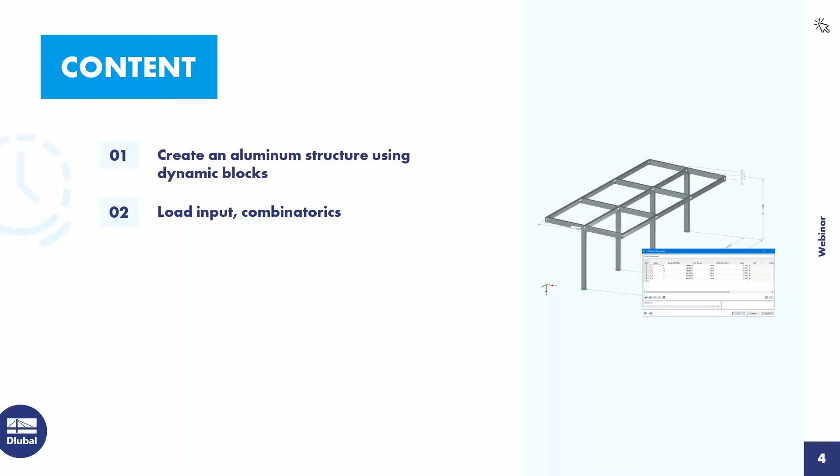Now to the agenda. First point is creating an aluminum structure using dynamic blocks. Then load input and combinatorics. Then the design of the structure according to Eurocode 9. And finally the printout report documentation.

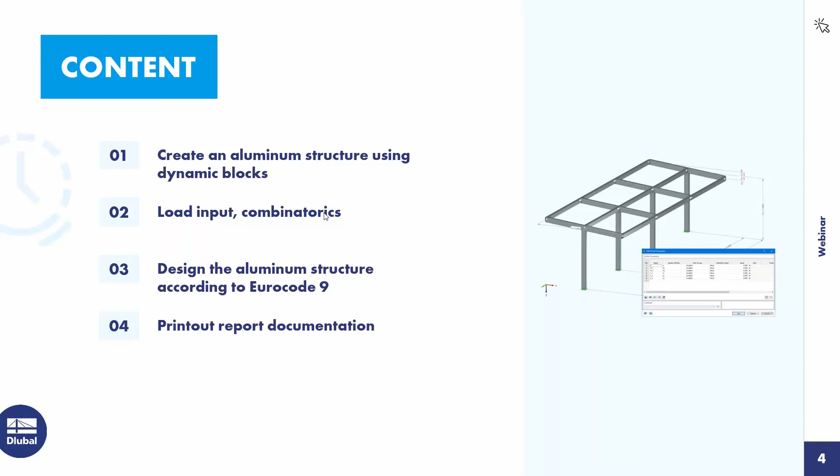This construction can be modeled by entering objects in graphic or tabular form directly in RFEM. This has already been shown in detail in previous webinars. In addition, there's also the option of saving object groups as a block and then reusing this block. In RFEM, three block types are distinguished: non-parametric blocks, parametric blocks, and blocks with JavaScript. I would like to introduce you to all three block types.

In the case of a non-parametric block, the structure has been created without parameters. The model you see here was created this way. The node coordinates are defined by values, with no formulas used. In order to save the structure or partial structure as a block, it must first be selected.

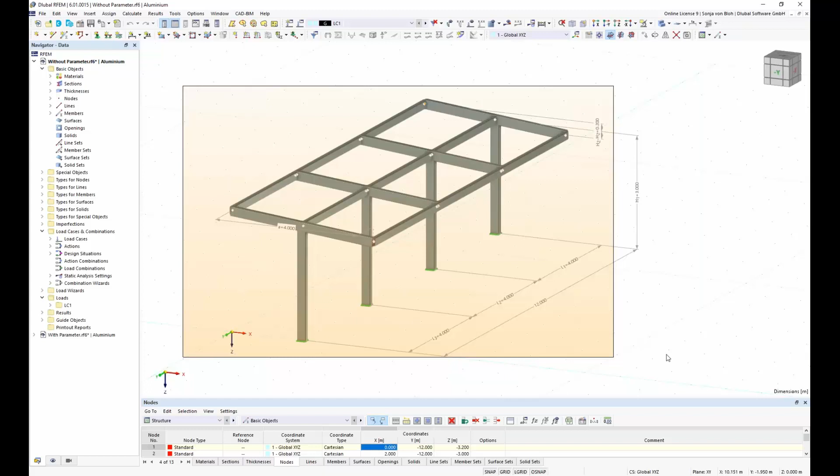I want to save the entire structure as a block, so I select the entire structure. Then I go to File, then Save as Block. Here I have to enter the name, and I also have the possibility to do a classification.

The classification is used as a filter so that I can find the block more easily. A few categories have already been created. Here I choose the category Beams.

The block can now be inserted into any file. I insert the block into the same file. For this, I open the Dlubal Center Blocks that manages these blocks. Here many blocks are included. You can see the beams, and you can also use towers and masts, and so on, for your daily work.

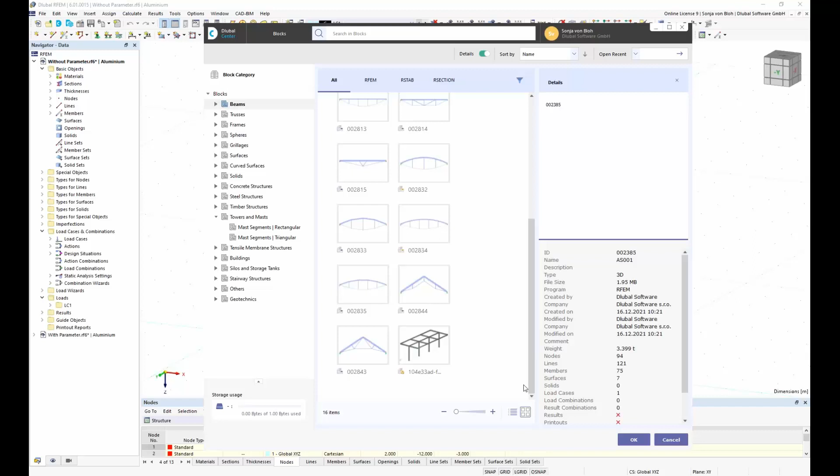I first switch to the filter in which I saved the block, and then I select the block. I find it here, then I click OK.

In the main tab, I can set the insert point of the block by choosing the node in the graphic, or I can choose the node in the drop-down here. Then I can define the position of the insert point. I can write the coordinates here, and I also have the possibility to pick this coordinate in the RFEM work window.

In the Structure tab, I can change the material, the section, and nodal support. This information was read from the construction which I saved as a block. If I want to change the section, for example, I can click on the three dots here. This opens our section database, and I can use any section included in this database.

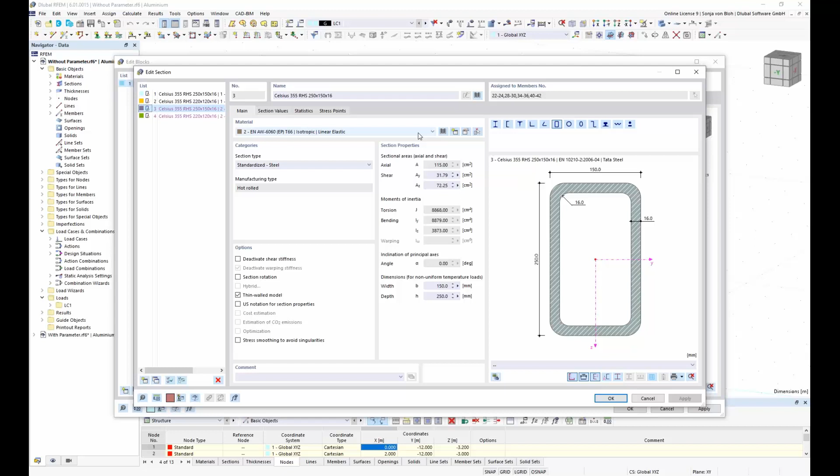I now click OK, and the block will be inserted into the file. The block reference is not lost. I can edit or convert the block to normal geometry.

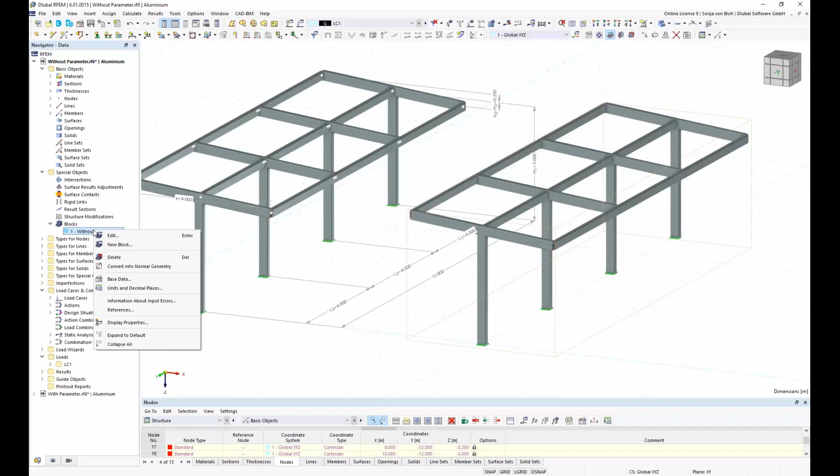I find the block here in Special Objects, Blocks without parameters, and if I want to edit this block, I choose the Edit button, where I can edit the coordinates or the structure. If I change the coordinates here to 15 meters, the block will be moved - you see this here. There's also the possibility to use this function directly in RFEM: you can move the block by drag and drop.

That's all for the blocks without parameters.

In the case of a parametric block, the construction has been entered in such a way that the structure depends on parameters. I've prepared such a model that you can see here. In addition to the geometry, loads can also be parameterized. The parameters can be set in the global parameters window. Here I have already created the lengths A, H1, H2, L1, L2, and L3. They have the unit group lengths, but I can choose another unit group as well. Here you have forces and moments and so on if you want to use parameters for forces or for loads.

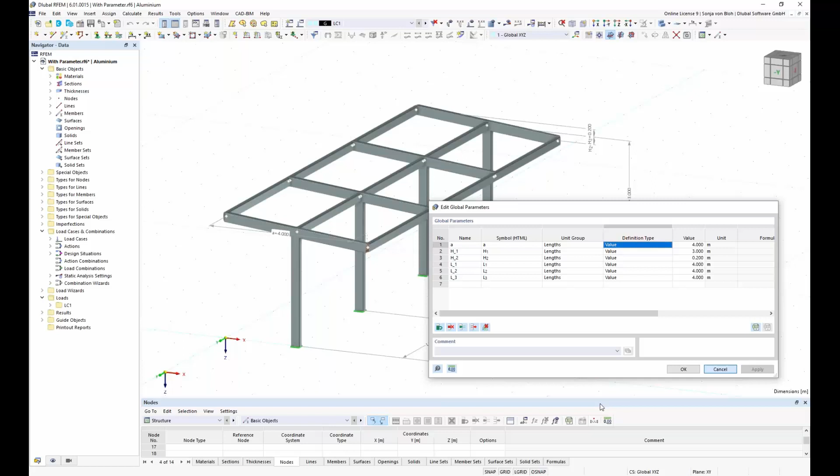Then I've selected the definition type value. You also have the possibility to use formulas. I have defined the coordinates using these parameters via a formula. You can open the formula if you click on this symbol here. And here you can see the node coordinate y is calculated as minus L1, minus L2, minus L3.

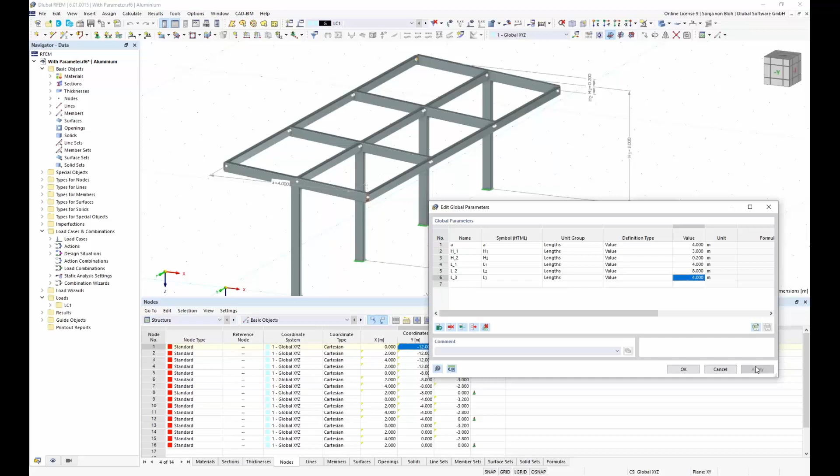If I now change the parameter, the structure will be changed. I can change it back.

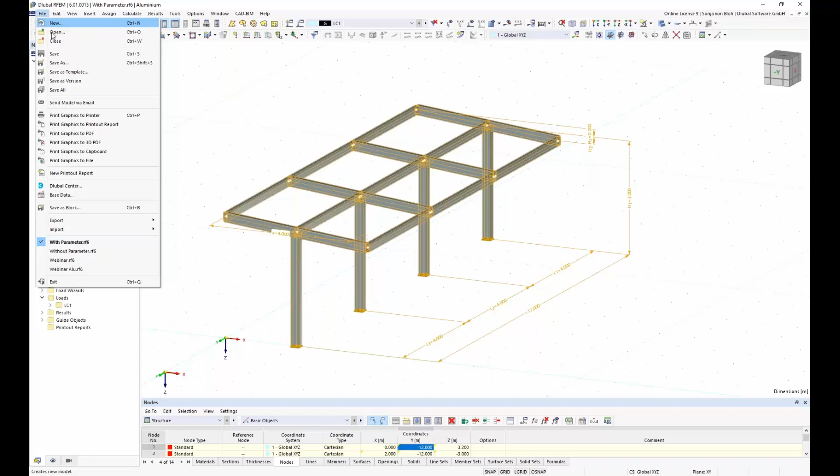If I now want to save this structure as a block, I have to select the structure again. I want to save the entire structure, so I select the entire structure. Then I go to File, Save as Block, give it the name 'with parameter' and also the model category beams. Click on OK.

And then I will insert this block into this file. For this, I open the Dlubal Center blocks. In the filter beams, I find this block. And in the main tab, I can do the same things like in the other block. I can choose the insertion point. And then I go to the structure. Here I have the same possibilities like in the other block.

I can choose the material, the cross-section and the nodal support. But in addition, I also have the global parameters that I have defined in the structure before. And here I can change these lengths as I want to. I click on OK, and the mapping to the global parameters is lost. If I insert this into the file, I can see this if I change the global parameters. Click on OK. Then only the structure with the global parameters will be changed.

Not the structure that I've saved as a block, but you also have the possibility to edit the block parameters in the structure tab. In addition, it's also possible to assign the global parameters to the block parameters.

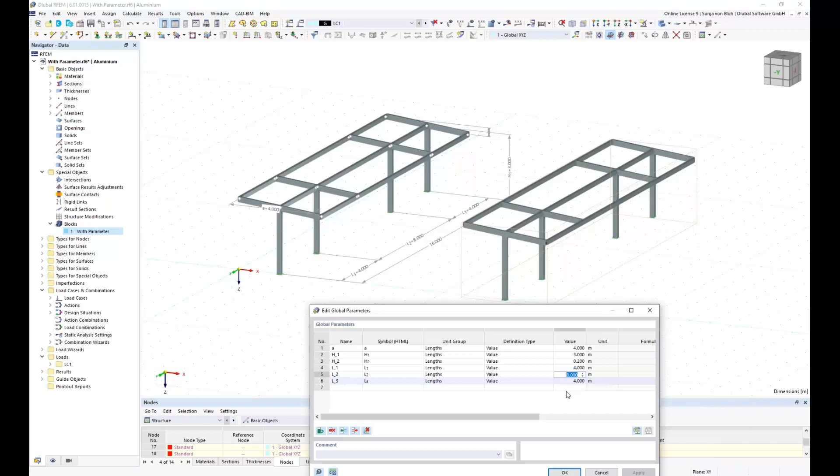If I define it here as equal A, equal H1, equal H2, equal H3 - oh sorry, L1, equal L2, and equal L3. If I now change the parameters, in both structures, the parameters will change.

However, with the parametric block, it's not possible to add or delete structure objects within this block. If I saved the canopy as a block with 4 columns, as in the example, I cannot add a 5th column within the block. I can add this in RFEM, of course, but this possibility to create dynamic blocks is possible with blocks that use JavaScript. This brings me to the third block type, blocks with JavaScript.

With scripting, I can create the topology, the load cases, and the loads. For the creation of script files, you only need an editor like Notepad++. I created a JavaScript file to generate the canopy presented earlier. The 3 main functions, global parameters, input data, and generate, are available for defining blocks. I only used the input data that you can see here and the generate function in my script. The global parameter function is not used in my script file.

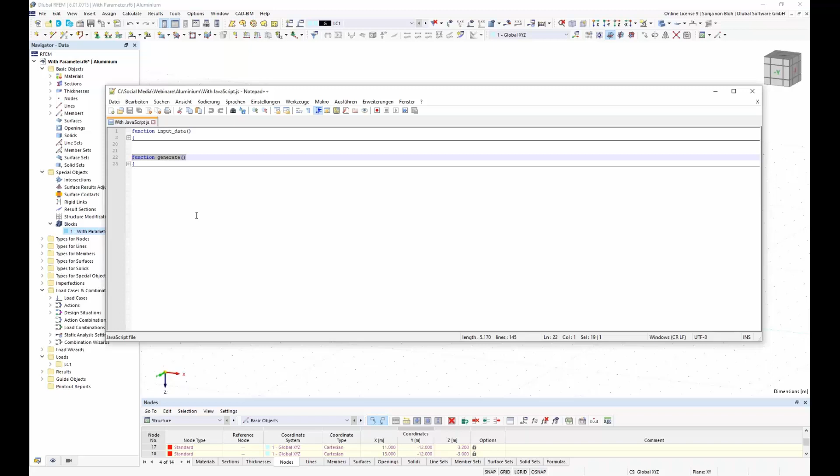The global parameters function is used to create global parameters, which, as I have already shown, can also be used in the blocks. The input data function is used to create the input table in the block dialog with input parameters. Here I show this function.

In the input data function, a category can be created in the blocks input table using the category function. This is this here. Here I've created the categories basic data, geometry, supports, and sections. In the basic data category, I then use the parameter int function to create an input parameter n, here, of type integer. This is used to dynamically generate the number of bays.

In the category geometry, I create the input parameters A, H1, H2, and L with the function parameter float. The parameter L is created dynamically via the multiplicity counter key n, which I defined above in the parameter int.

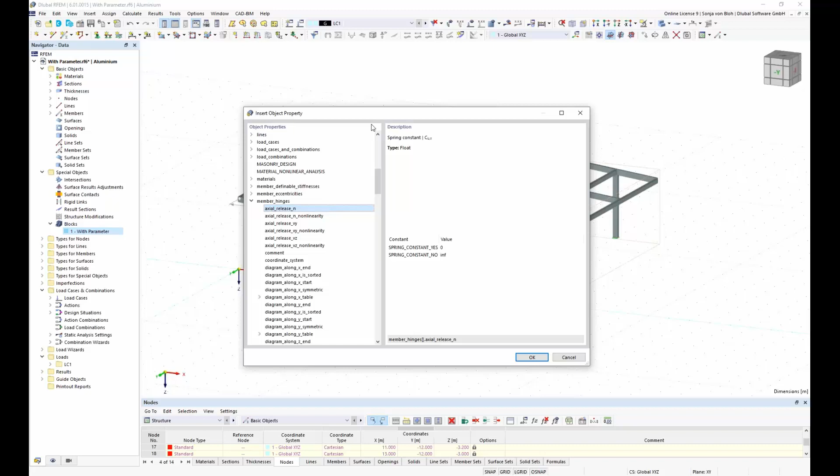The nodes are created here, also the members and the supports, the nodal supports. And here I also create, in this function, the dimension with linear dimension.

A documentation on the blocks with JavaScript will be available later on GitHub.

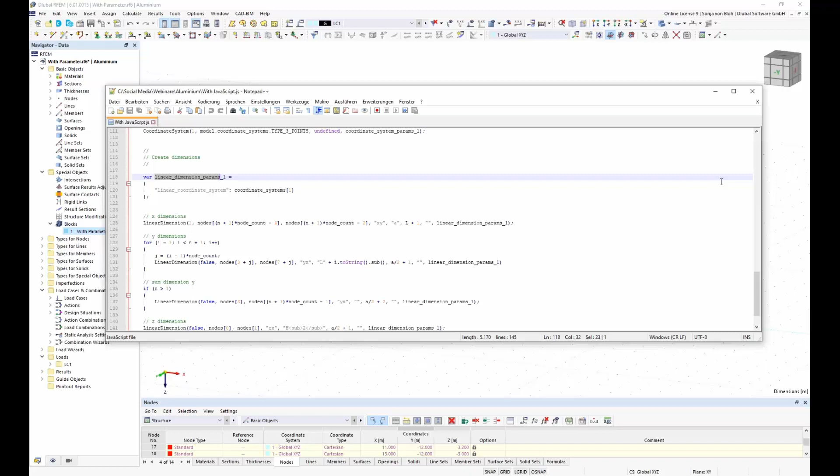To create the block, the function for creating a block can now be called in any RFEM file. The file content is only used to create the image in the Dlubal Center blocks and has no other function.

I first go to File, Save as block, and then I call this block with JavaScript. I choose the model category beams, and here I have to choose the JavaScript file. Then I click on OK.

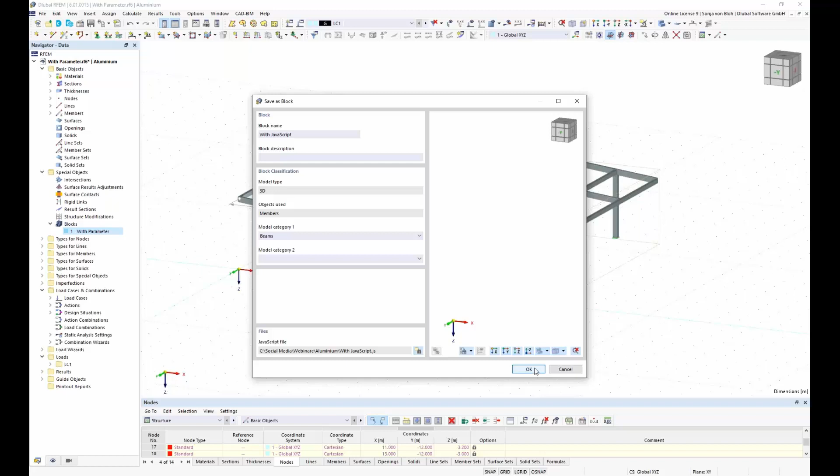If I now open the block, you have also the same option in the main tab. And in the Structure tab, you have here the number of bays n. Here I have predefined 3, that means you have 3 bay lengths that you can see here, L1, L2, L3. To make this dynamic, I can choose here also 5, and then you can see this has changed to input L1, L2, L3, L4, L5.

Okay, this brings me to the creation of the model of the webinar. I close this file and create a new one with File New.

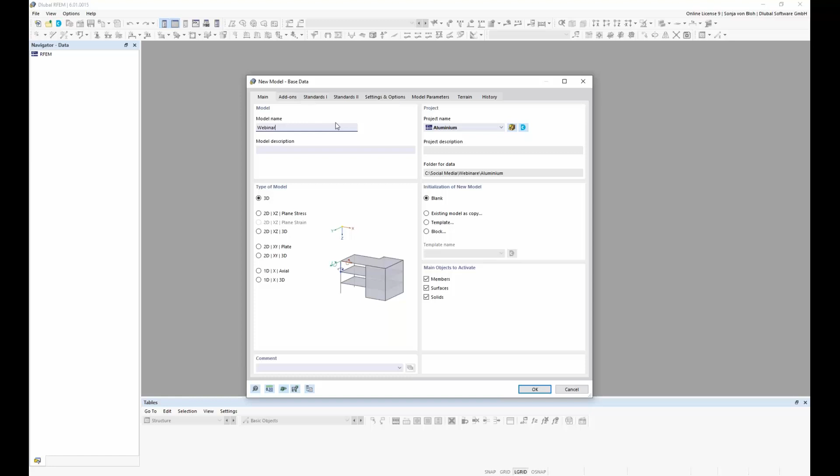In tab Main, I define the model name with Webinar. I choose type of model 3D, and then I go to the tab Add-ons.

Here I can select the add-ons that I want to use in my model. A green dot in front of the add-on indicates that a license is currently available for it. An orange or blue dot indicates that the add-on can only be used in demo mode or as a trial version. I select the aluminum design, and the 2 checkboxes, Combination Wizard and Load Wizard, are activated by default.

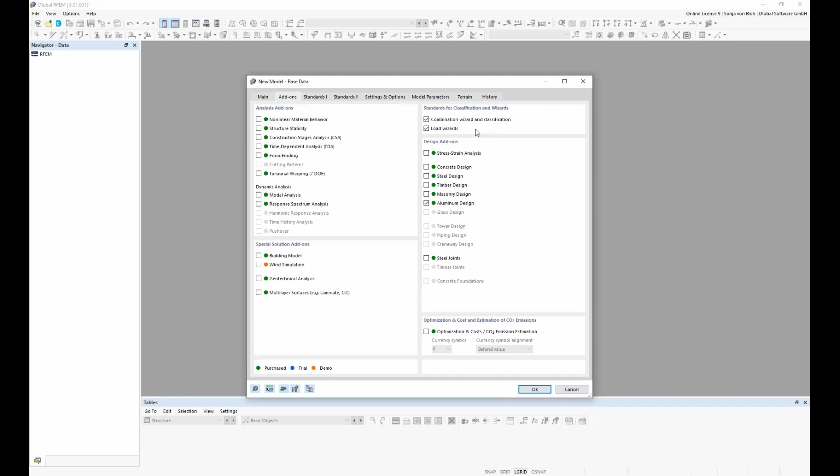This uses the Combination Wizard and the Load Wizard to combine load cases and to generate wind and snow loads. Then I go to the Standard tab.

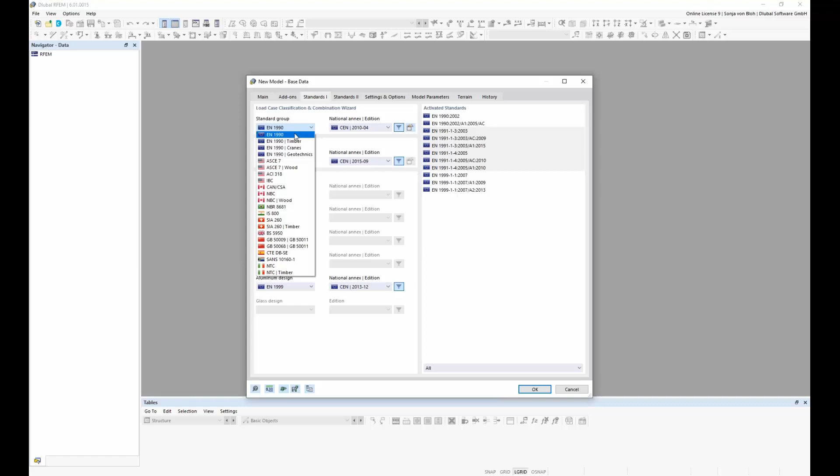Here I specify the standards for the load case classification. I have here several standard groups for my choice. I select the Eurocode 1990 and the national annex from Germany. For the load wizards, you also have several standard groups, and here I also select the German national annex.

For the design of aluminum, I have 2 possibilities: I can use the Eurocode or the American standard ADM. Here I want to show the Eurocode, also with national annex from Germany.

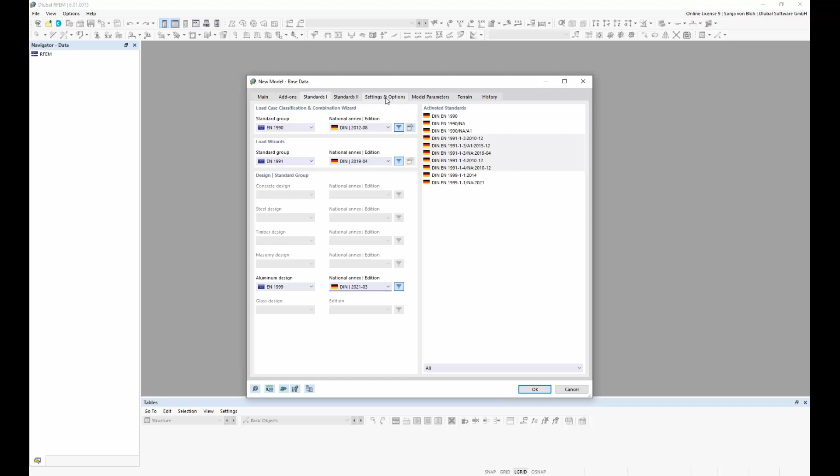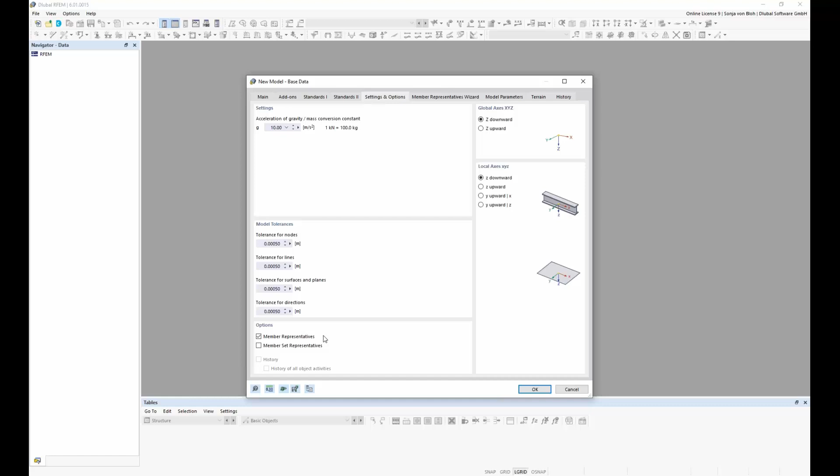General information such as acceleration of gravity and tolerances can be specified in the Settings and Options tab. Here I activate the member representatives. A member representative is a sample member with identical properties. The settings for the member representatives can then be made in the member representatives wizard. RFEM checks all members for similarities with regard to the activated criteria and outputs the result as a list.

I can then assign properties such as effective length via the member representative, which defines these properties for all members of this member representative. This means I don't have to assign these properties to each member individually. Furthermore, I can easily find members with the same properties via the member representatives.

Then I go to the tab Model Parameters. Here the geographic position of the model can be specified and information about the model can be entered. I want to assign a location here. To do this, I click on the 3 dots here, and here I have to enter the location.

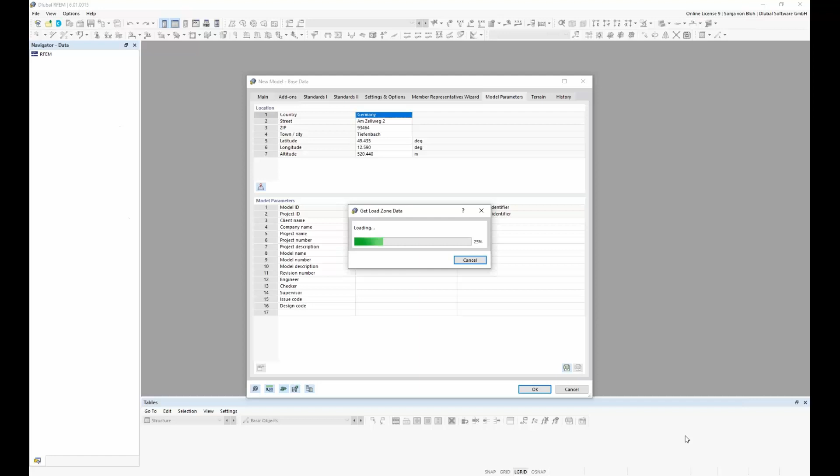I choose our company headquarters, that's located Am Zellweg 2 in Tiefenbach. And then I can confirm my choices with OK. The load wizard for snow loads and for wind loads then uses the load values of the specified location. And I click on OK.

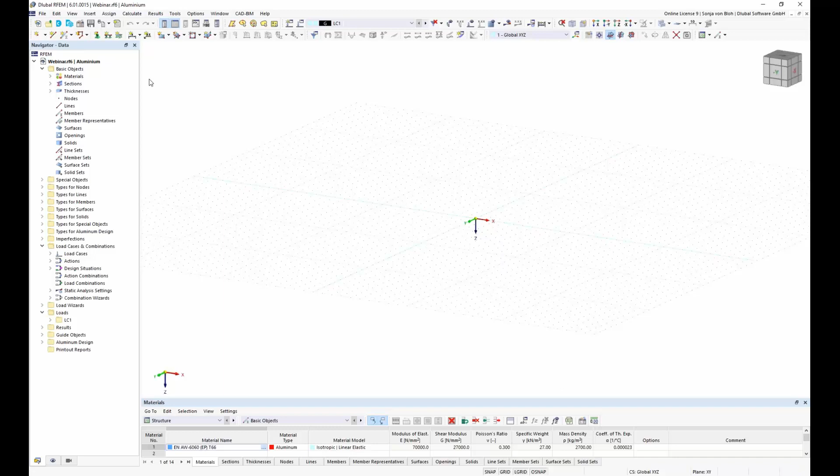This will create a new file. And to create the model, I insert the block I created earlier. For this, I open again the Dlubal Center blocks, go to the filter beams, and choose my block with JavaScript. I then click on OK.

I choose the insertion point numbers 16, and I define the x coordinate in 2 meters. Then I go to the Structure tab. Here I choose a different nodal support, here I choose this type. And for the purlins, I choose a different cross-section.

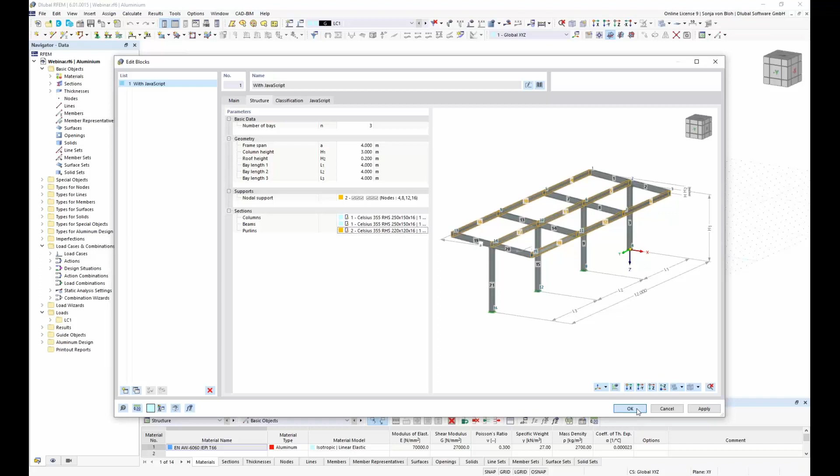The model has been created so far, so that I can now create the load cases. The load case LC1 is automatically generated, that's a load case self-weight. And the active self-weight checkbox is already activated here, so that the self-weight of the structure is automatically generated as a load.

In the static analysis setting here, I can select which calculation theory should be used to analyze the load cases. Analysis types are already preset for this. Here I have the analysis according to first order, second order, and third order. If I don't find the static analysis settings that I want to use, I can create a new one, or I can edit the settings here in the Edit Static Analysis Settings tab window.

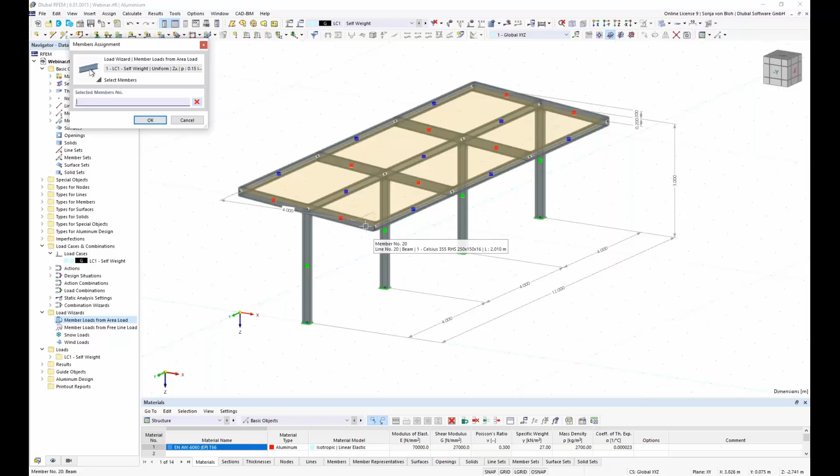Furthermore, I can specify here which members should be excluded from the load application. Here I choose members parallel to the beam, and then I click on OK. The load can also be displayed separately with this function, display separately, for control purposes. Here you can see the load distribution. Okay, the load is okay.

And then I define the next load case. Here with new load case, I want to define a snow load. So I give this load case the name snow. Then action category should be snow. And then I click on OK.

For this load generation, I also use a load wizard, here the load wizard snow load. This load wizard simplifies the task of creating snow loads on members of the model in accordance with standards. So I create the new snow load, and in tab main I have to choose which roof type I have. Here I have the choice between flat, monopitch, and duopitch roof. I have a flat or monopitch roof, so I choose this option.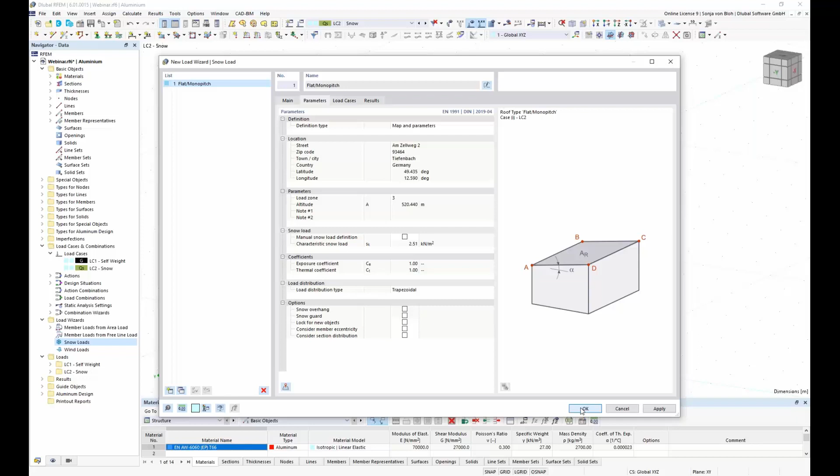I can also show this load separately, and then I define my snow overhang with a new member load. For this, I change the load direction to global Z on projected length, and I define the load magnitude. This should be 0.537 kilonewton per meter, and then I choose the member where this load should be applied, and I click on OK. Snow load is finished.

So I have to define wind loads. If a canopy roof like this should be designed, a load determination with regard to section 7.3 of Eurocode 1991-1-4 is required. We only have a load wizard for closed buildings, which you can see here - that's the load wizard for wind loads, but they are only for closed buildings. So I have to apply the load manually or with the help of RWIND.

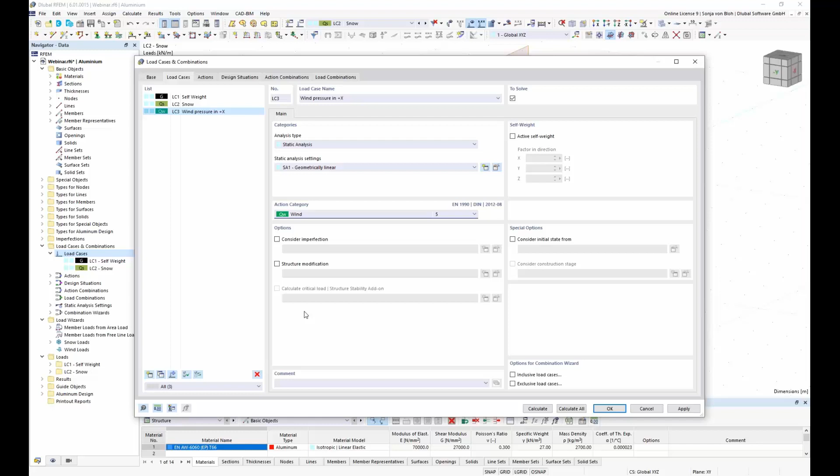So I create a new load case: wind pressure in +x, with action category wind. And then I click on OK.

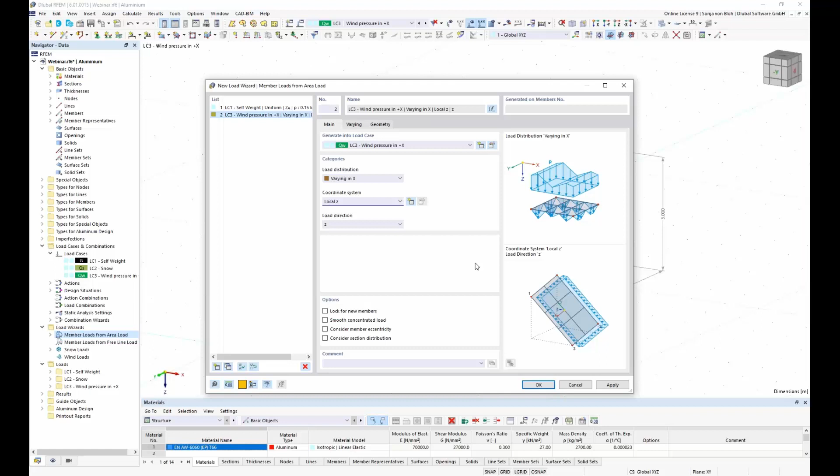Then I use the load wizard member loads from area load. Here I choose the load distribution varying in x. And I want to apply the load perpendicular to the load plane, so I choose here local Z. And then I go to the tab varying, where I have to define the area load parameters.

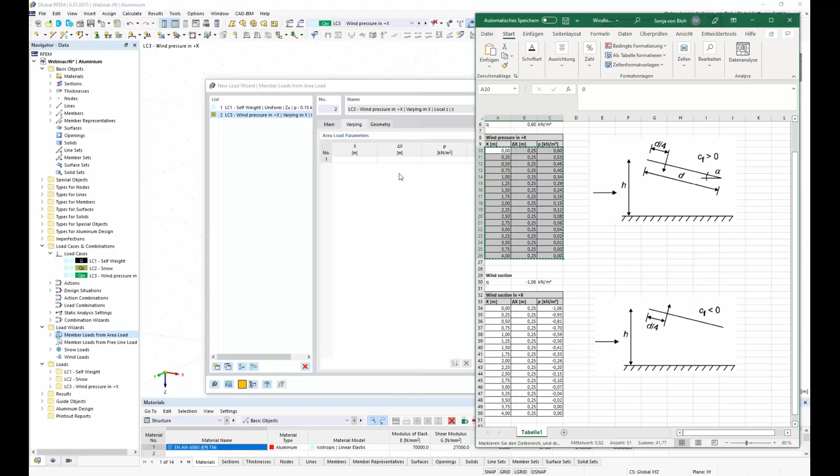I've calculated it before with Excel according to the technical article I've shown you before. And here I copy the load parameters and paste them here. Then in the geometry tab, I have to define the boundary of the area load plane. For this, I choose my 4 corner nodes.

Click on OK. And I don't want the load applied on the members, so I select the member and then click on OK. I can also show the load here as area load. Here you can see the parabolic distribution of this load. The second load is the wind suction in +x direction. For this, I copy the wind pressure in +x direction.

I rename this load case. This is now wind suction.

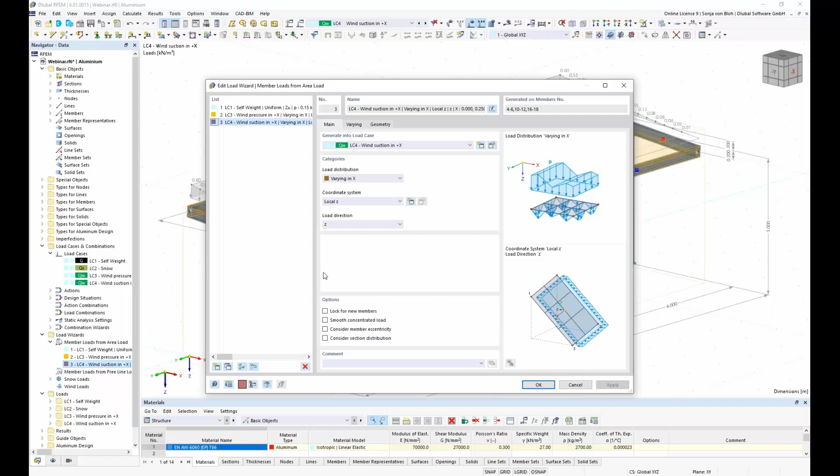Click on OK. I only have to change the parameters in the member loads tab, varying. For this, I copy the wind suction parameters, and click on OK.

Wind loads are finished. In a stability analysis, I determined that the influences from second order theory must be taken into account. How such a stability analysis can be done has already been shown in previous webinars. So I have to generate load combinations according to the second order theory, and apply global imperfections.

For this, I create the imperfection case, imperfection in plus x. We go here to imperfection, then new imperfection case. This should be my imperfection in plus x.

Here I choose the imperfection type: local imperfection. There are many more imperfection types.

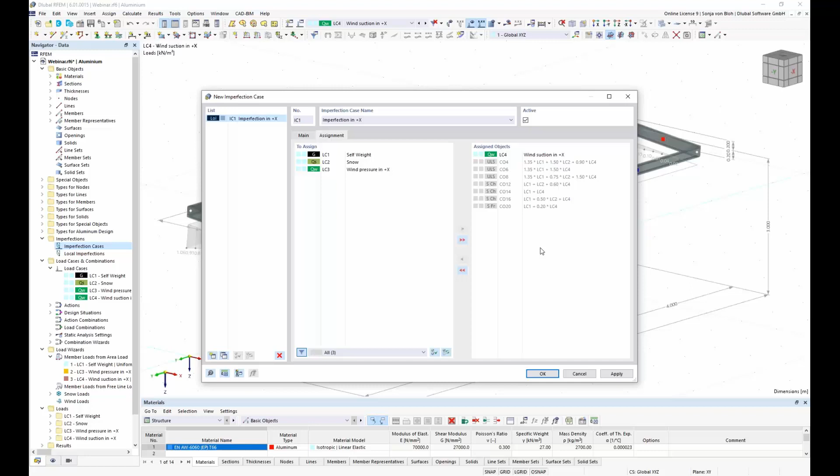Now I have to define the local imperfection. For this I create a new member imperfection. I choose the members where I want to apply the imperfections.

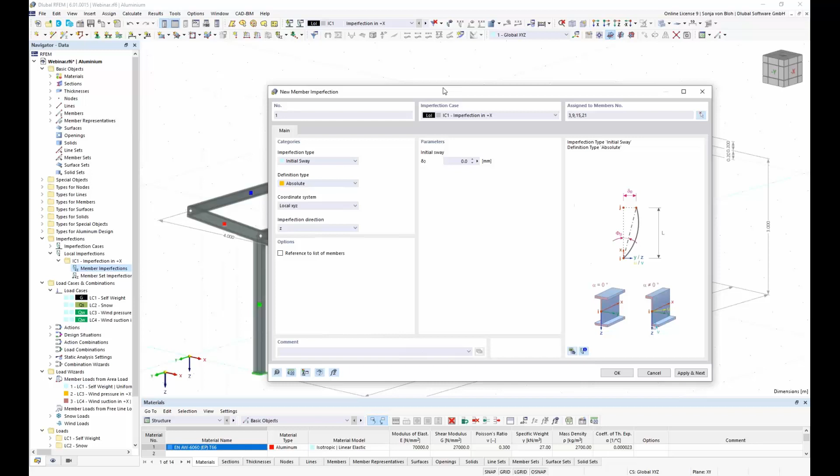Then I have to choose the imperfection type. Here you have the possibilities: initial sway, bow, and so on. I choose initial sway, and you have many definition types.

I want to define the imperfection according to a standard, so I choose the standard, and I have to define the imperfection direction. If you want to see the directions, you can click here on this button and then see the result.

And I want to assign this imperfection in plus x direction. This is the local z direction here in this case.

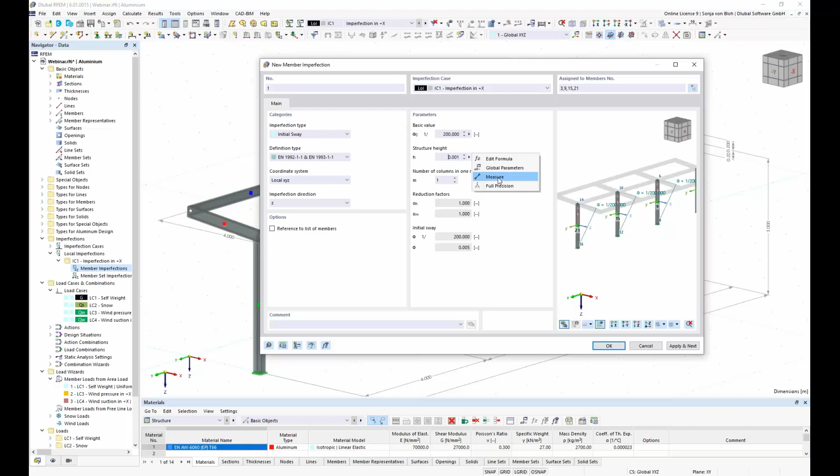Then I have to define the structure height. I will measure that from the column. And the number of columns in one row is 1 in this direction.

So I click on OK, and the imperfection is created. I can show this with this button here.

The other imperfection will be created by copying this imperfection. So I click here on copy selected imperfection. It's the imperfection in minus x direction. I click on OK.

Then I only have to change my imperfection direction to minus x. Here I can see the results.

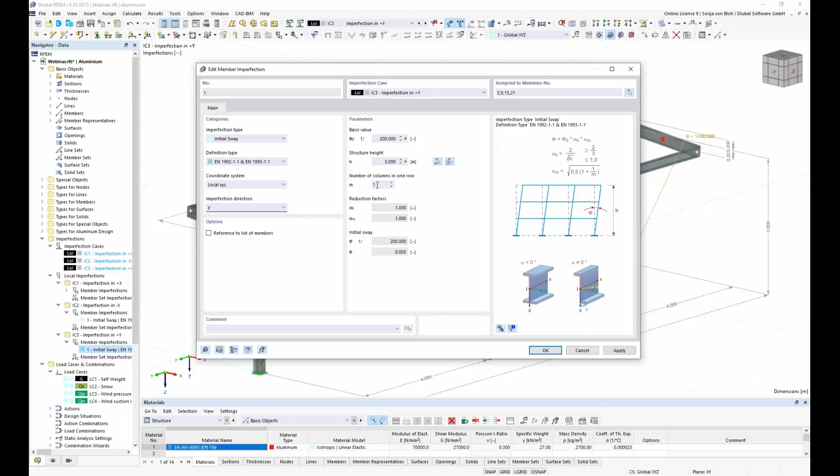Then I need an imperfection in plus y. Here I have the imperfection direction y, and in this direction I have 4 columns, so I choose 4 and click on OK.

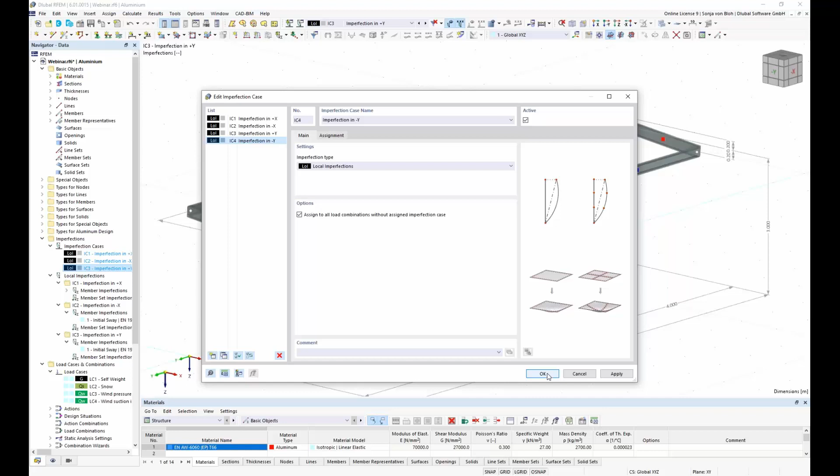Last imperfection is the imperfection in minus y.

Now the imperfections are complete, my load cases are complete, and so I can make settings for the combinatorics. For this, I go to the load cases and combinatorics, to the combination wizard.

I'm defining here the second order analysis, and then I activate the checkbox generate same load combination without imperfection case, and that's all I want to do here.

Furthermore, I make settings for the actions. For this, I open the Action tab, and the action category corresponds to the category of the corresponding load case.

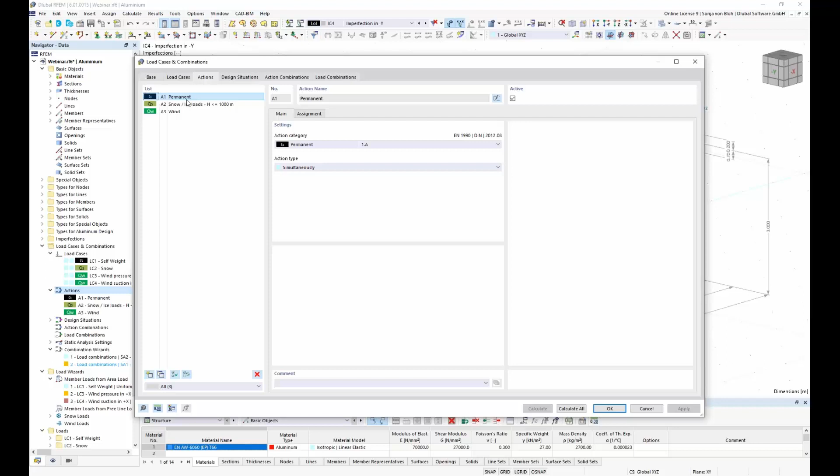For action category permanent, I have here assigned the self-weight. For the snow loads, the snow. For the wind loads, the wind.

The action type controls how the load cases of the action are taken into account in the superposition. Here you have the possibility to use the action type simultaneously if they can act in the same load combination, or alternatively if they don't act together, so I choose this option here.

Then I go to design situation. The standards describe how the actions are to be combined. Eurocode 1990 requires designs of the ultimate limit state and the serviceability limit states, for which specific combination rules apply. This is considered in the program, and 4 design situations that you can see here are automatically generated by default.

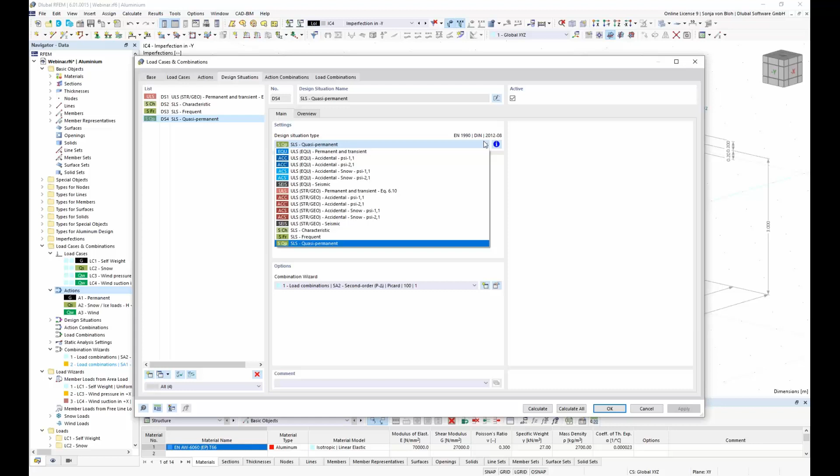However, I can also add other design situations. If I click here on this button, create new design situation, I can also choose the design situation type that I want to use. On the info button, you get information on the combination rules of this design situation type.

Then I go to load combination, which generates my load combinations here. Static analysis settings are second order, that's what I wanted to have. So the combinatorics are okay now.

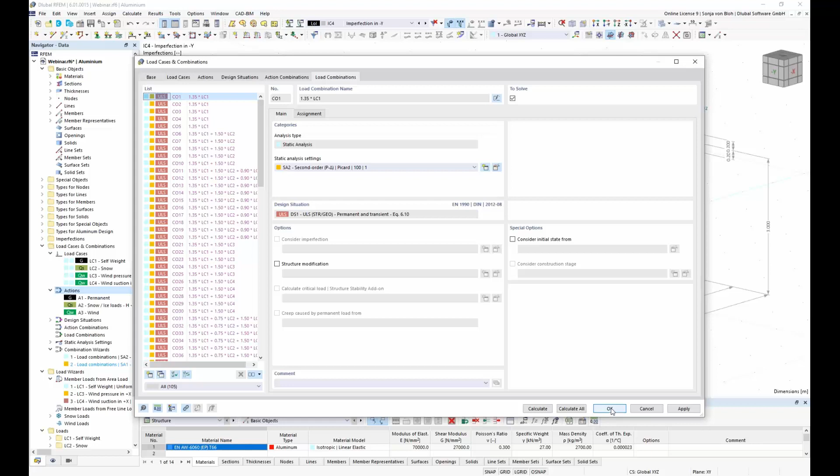So I click on OK, and then I have to make my aluminum settings.

And this I want to do with the member representatives. RFEM has detected 3 member representatives. These are colored with this quadratic symbol here - the green one, the red one, and the blue one. These are the columns, the beams, and the purlins.

I can give these member representatives a name. So I double click on this member representative and give it a name. I name this one columns, the first one members, and the third purlins.

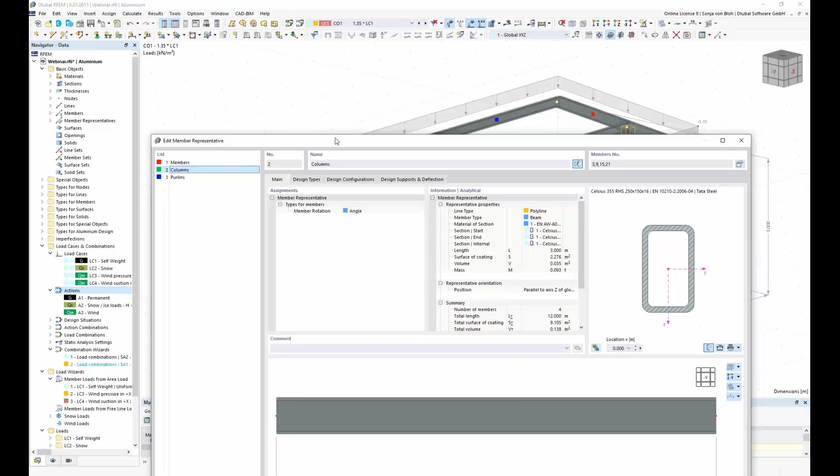Okay, then I go to the tab design types. Here I have the possibility to define effective lengths, local section reductions, shear panels, and rotational restraints. First I create a type for the effective length for the design of the columns.

For this I click on create new effective length. First, it must be specified which forms of stability failure exist for the member. According to Eurocode 9, the possibility of torsional or lateral torsional buckling for hollow sections can be neglected, so I deactivate the checkboxes torsional buckling and lateral torsional buckling. However, these checks are not performed by default. On the ultimate configuration, I can also make other settings for this, which I will show later.

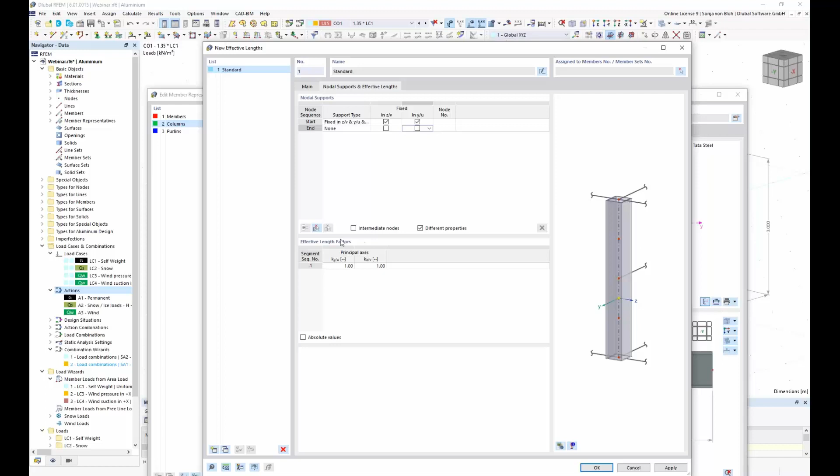Then I go to tab nodal supports and effective lengths. Here I define my nodal supports and the effective length factors. This is okay.

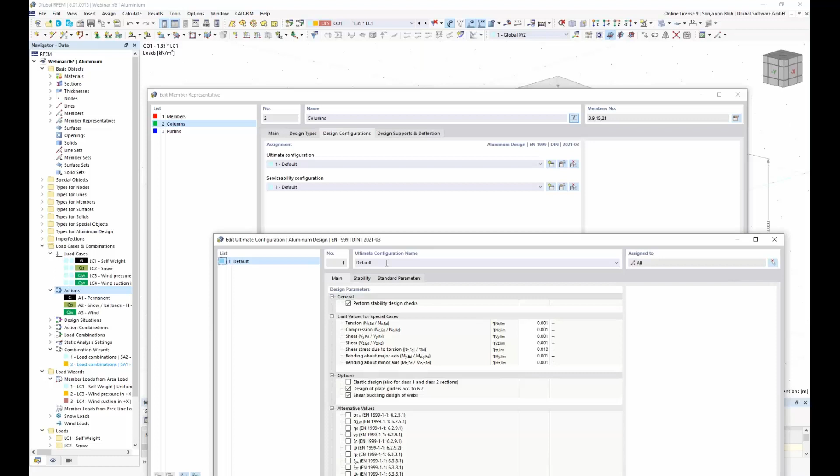And I'll start by looking at the ultimate configuration in the design configuration tab. Here I go to edit and I name this ultimate configuration columns. And here the stability design checks are activated.

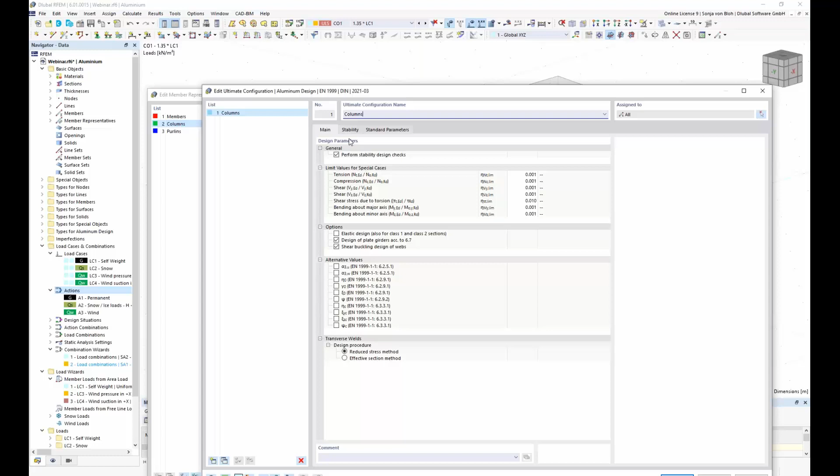Here you have the possibility to define alternative values that are described in the standard, or here you have the possibility to perform the design for sections like hollow section, as I mentioned before, if you activate this checkbox. Okay, go on OK.

If no design configuration is assigned to an object to be designed, then no design checks are carried out in this configuration for this object. I don't want to do a serviceability check of columns, so I don't choose a configuration here. Then only the ultimate configuration will be used, and only the stability checks and cross-section checks will be done.

Then I go to member representatives. Here I wanted to name this beams - oops, beams instead of members. And in this member representative, I don't want to do a stability design.

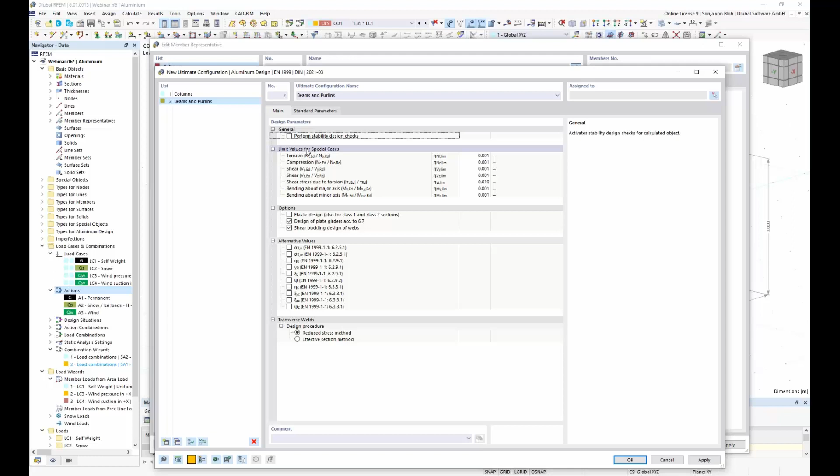So I create a new ultimate configuration. I go here on, and I name this beams and purlins, and here I deactivate the checkbox perform stability design checks. Then I click on OK.

Then I want to see my serviceability configuration. For this, I click on Edit Serviceability Configuration to open this window. In the serviceability configuration, the limit values to be checked for the design can be specified. The deflection limits are defined as a fraction of the reference length. A distinction is made between the cases of beams and the cases of cantilever here in this section.

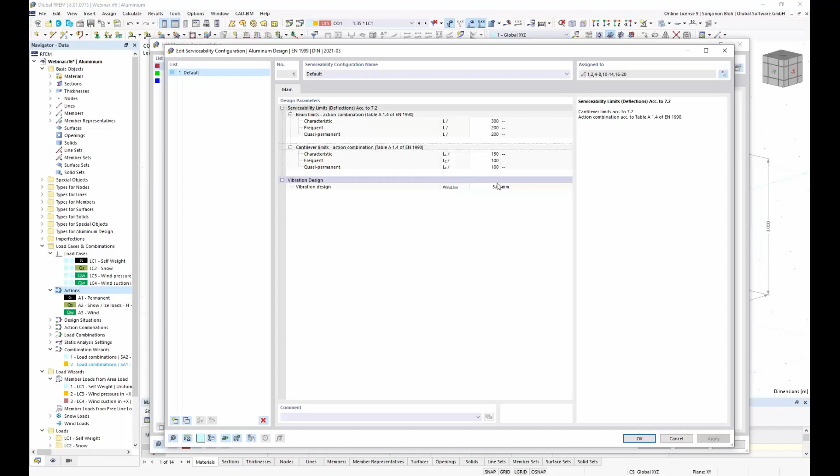Okay. Then I go to the tab Design Supports and Deflection. For the aluminum design, the beam type is derived from the defined design supports. If I define a support on both sides of the member, the type is interpreted as beam. If a support is only defined on one member side, the member type is interpreted as cantilever. Depending on the type of beam, the limit values defined in the serviceability are used.

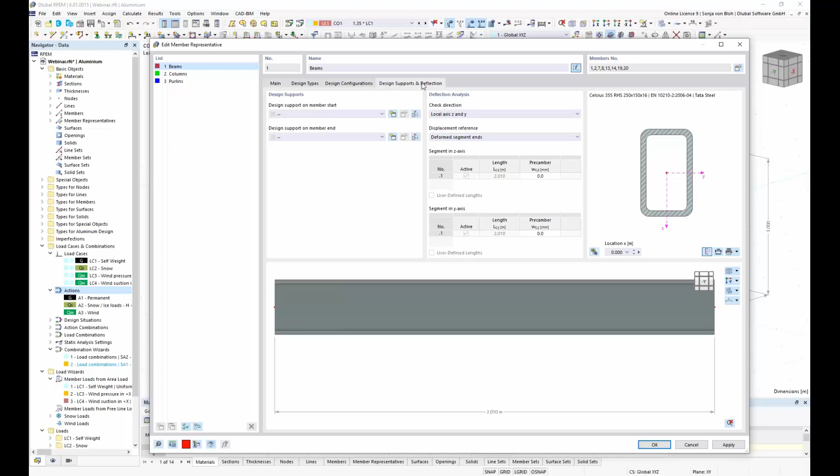Here I have a cantilever, so I only define support on the member start. For this I click on New Design Support, and here I activate the support in Z-axis. You have here the possibility to define the support width and depth, but this has no influence on the design. Then I click on OK.

Then I choose the check direction. Check should be done only in local axis Z. For displacements reference, you have here two possibilities - should be deformed segment ends, and the design supports also take on the function of segmenting the members for the deflection check.

Such design supports can be defined at every intermediate node of the member. Depending on the location, you can use this to check different reference lengths for determining the permissible deflection. But I don't have a node here on this member, so I don't use this.

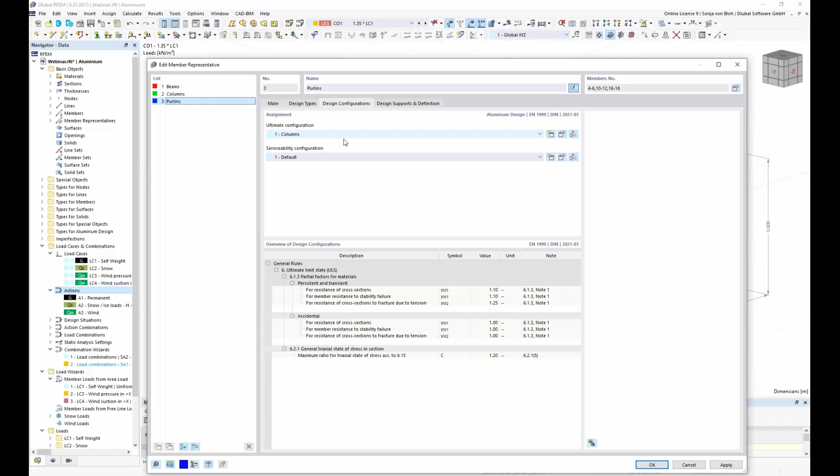Then I go to the member representative purlins. Here I go to design configuration. I want to use design configuration beams and purlins, as I don't want to do a stability check here. And I use the same serviceability configuration.

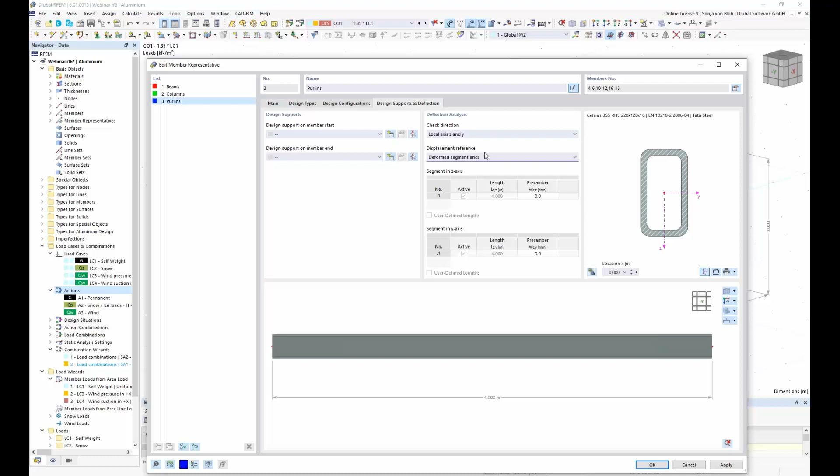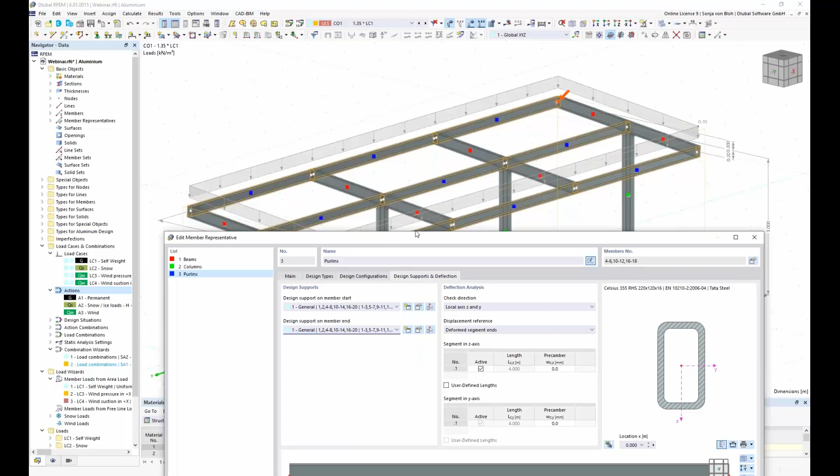Then I go to the design supports and deflection, and for this design, the purlins have supports on both sides of the member, so I use the same design support that I created before. Okay, then I choose also the check direction local axis z and y, and I think, okay, now I've defined all things here.

All types for aluminum design can be represented graphically. For this, I open the navigator display, and here you can see the types for aluminum design. You have several possibilities: you can see the member effective length graphically if you activate this checkbox, or you can see the member supports or design supports here.

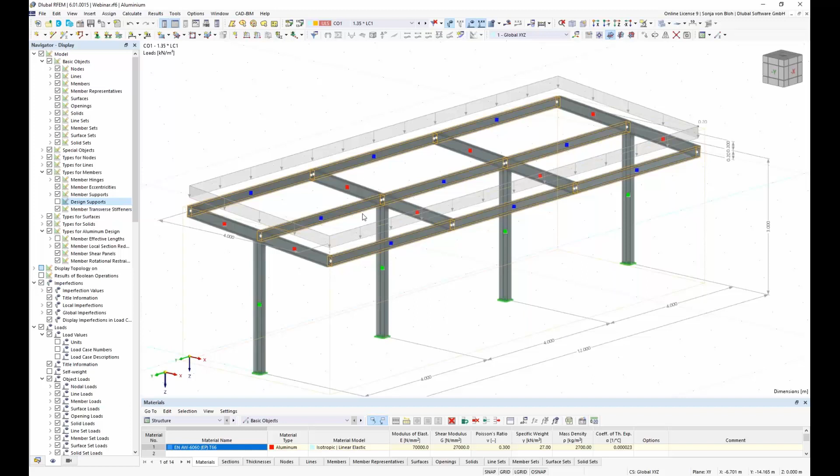This allows easy checking of the correct assignment and clear documentation of the graphic printout. I would like to show the other settings in the table, so I enlarge the table a little bit.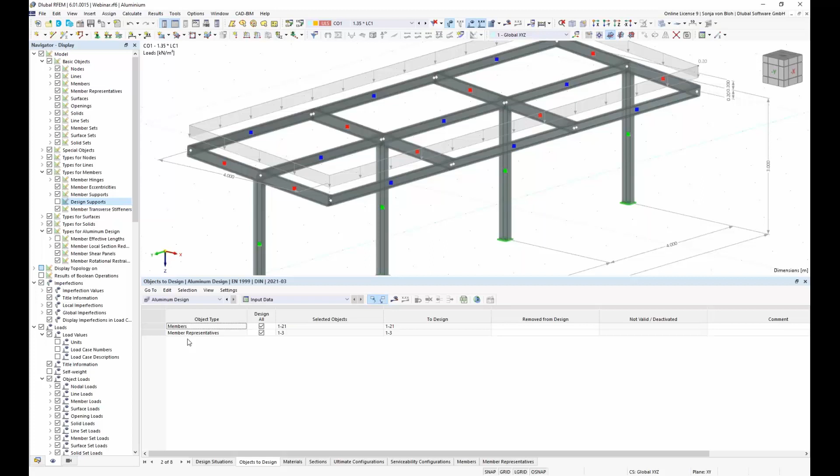Here you have the possibility to choose the table structure, imperfection, and so on, and you also have a filter for aluminum design. This shows the tabs for the design situations and objects to design.

In the design situations table, all design situations listed in the model are shown. Here you can decide whether and how a specific design situation should be taken into account for the aluminum design. I only want to check the first and second design situations, the other one I don't want to check, so I uncheck those checkboxes. You also have the possibility to choose a different design situation type if you want.

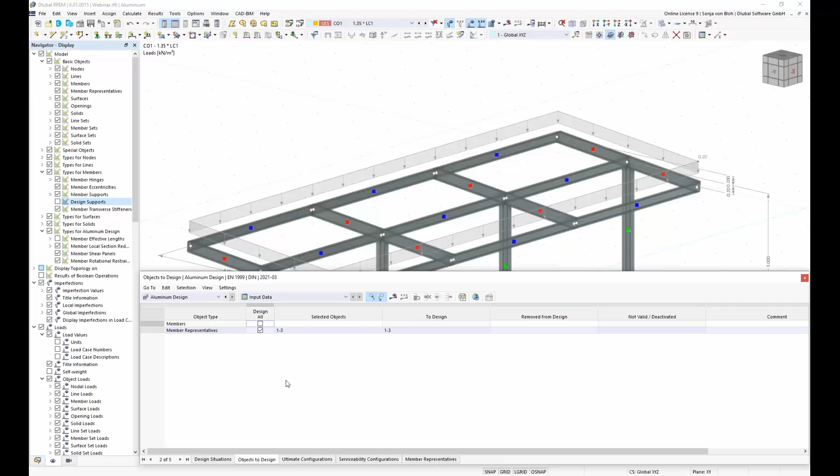Then I go to Objects to Design. All object types in the model suitable for design and the add-ons are listed as one row in this table. By entering an object number in the cell removed from design, you can exclude certain objects from the design. I only want to design the member representative, so I deactivate this checkbox. So all inputs are ready, and I can start my calculation.

For this, I click on Calculate All.

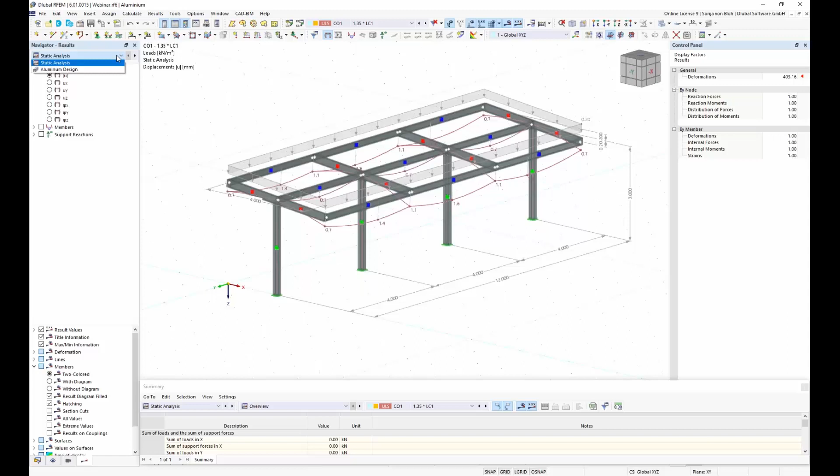After the calculation, you can choose navigator results if you want to see the static analysis results or the aluminum design results. If you choose this entry, here you can see the design checks graphically.

The design checks are also output in tabular form. For this, I choose aluminum design, and here you have many possibilities. You can see the governing results or design ratios on member representatives. You have several tabs: design ratios by design situation, by loading, or by material.

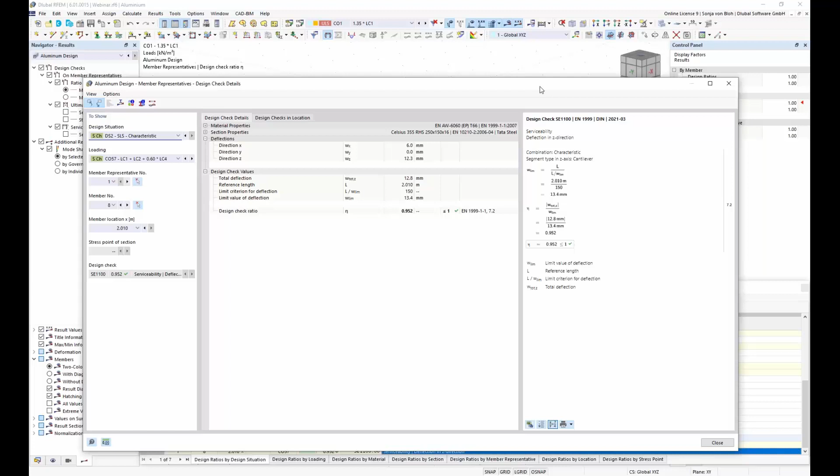You can open the details of the design if you double click on an entry in the table, and here you can see all details of the design, also with formulas. Here you can see this member is characterized as a cantilever, and you can see the design check.

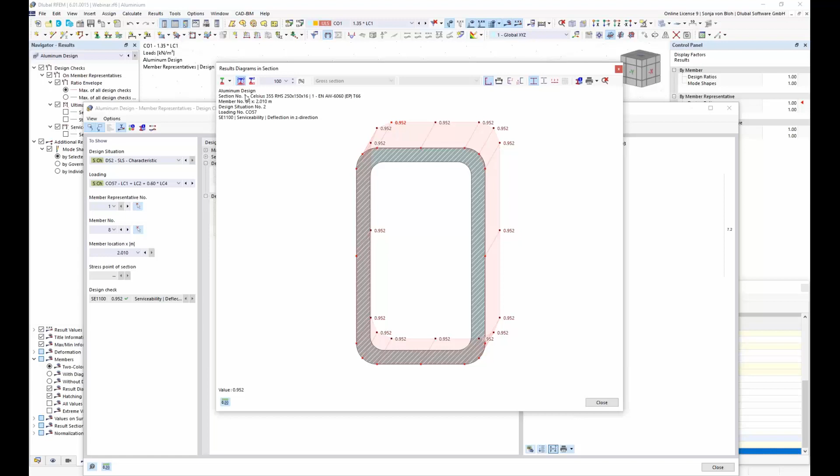Further detailed graphics are also available if you click on diagram and section. Here you can choose the stresses, and then you can see the stresses on the section. It's also possible to show the result diagrams for the static analysis and for the aluminum design. Here you can choose which member representative should be displayed in the tab.

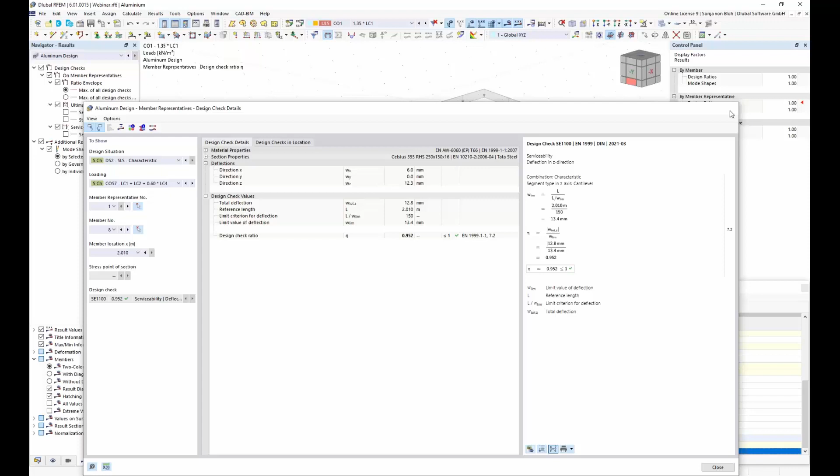Finally, I would like to show you the documentation. The aluminum design add-on is fully integrated into the main program, so the printout report functions are available for documenting the input data and results. For this, I go to the navigator data, and then I create a new printout report.

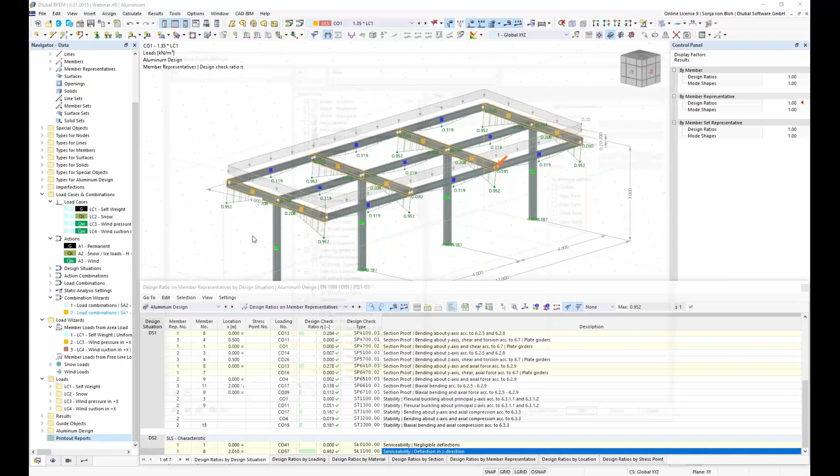In the list, you can choose which topics should be included in the printout report. Here I activate all, then I deactivate it. I only want to print the aluminum design topics in the printout report, so I check these topics.

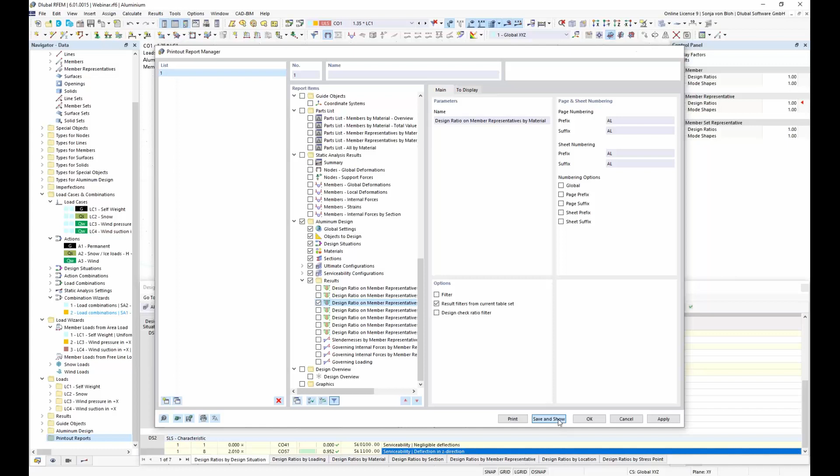Here I have additional filter options, and then I click on Save and Show, and the printout opens. Here you have the results in tabular form.

It's also possible to print graphics to the printout report. For this, I go to Print Graphics to Printout Report, and then I can do the settings in this window. For the graphic picture, I want to rotate this graphic, so I choose a rotation.

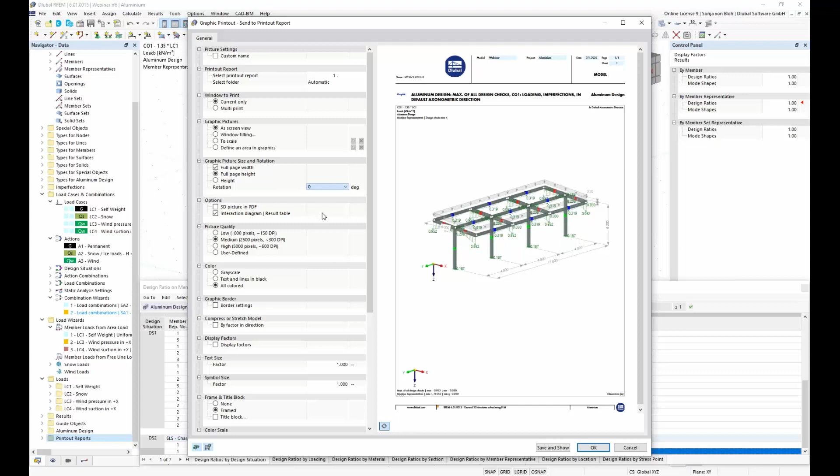270 degrees, and then I click on Save and Show.

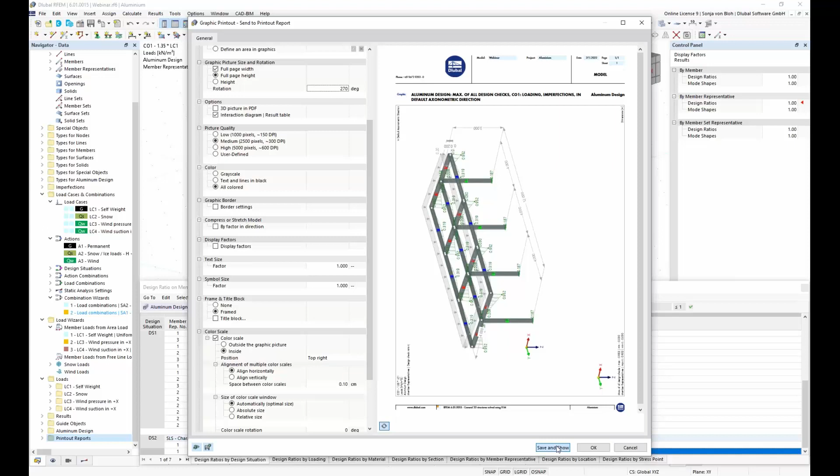With the documentation, I have now come to the end of my presentation. I now give the floor back to Andreas.